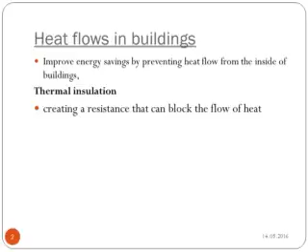Let's first define the purpose of thermal insulation and why we need it for new constructions and retrofitting. The purpose of thermal insulation in buildings is to maintain a comfortable and hygienic indoor climate at low ambient temperatures. A minimal amount of thermal insulation is required to protect the construction elements against thermal impact and moisture-related damage.

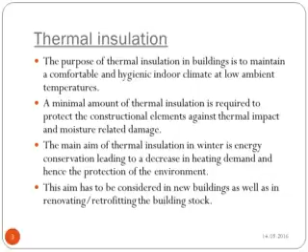The main aim of thermal insulation in winter is energy conservation, leading to a decrease in heating demand and hence the protection of the environment. This aim has to be considered in new buildings as well as in renovating and retrofitting the building stock.

And then we ask why thermal insulation is important for civil engineers and the public. Half of the energy we use to heat or cool our homes can simply leak out without insulation. Insulation helps to save money on energy bills, reduce energy use and lower greenhouse gas emissions, reduce reliance on heating and cooling systems, and finally, improve comfort.

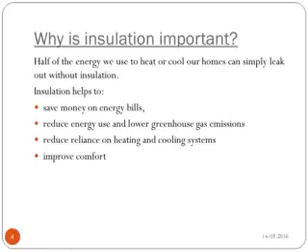Let's try to recall from the previous courses the terminology about heat transfer from materials. Thermal conductivity is a property of a material and is defined as the amount of heat energy transferred per unit thickness for a given temperature difference, expressed in watts per meter Kelvin. The lower this value, the more energy efficient is the material.

However, the thermal conductivity of a material is affected by density, moisture, and temperature of the material. When the material is moisture saturated, the thermal conductivity is increased.

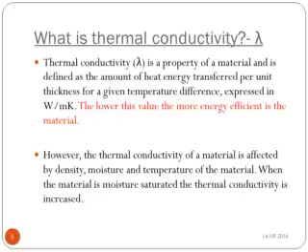The ability of a building material to conduct heat is quantified on the basis of its specific thermal conductivity value, that is, lambda. For insulation materials, coefficient lambda of less than 0.1 watt per meter Kelvin is preferable.

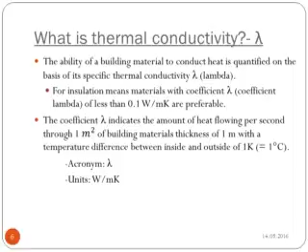The coefficient lambda indicates the amount of heat flowing per second through 1 meter square of a building material's thickness of 1 meter with a temperature difference between inside and outside of 1 Kelvin. Once again, the acronym is lambda, and the unit is watt per meter Kelvin. The lower the coefficient lambda, the better is the insulating material.

As long as we understand the meaning of lambda, now it is easier to learn about the U values. If you did not catch the definition of lambda from the previous slides, please watch carefully again while taking notes. Okay, now let's define the U value.

U value is the measure of the rate of heat loss through a material for 1 degree difference in temperature at either side of the material. As it can be understood from the definitions, thermal conductivity is a typical material property, while the U value can be calculated for structural members having different widths and/or for composite structural members made of different materials.

The calculation of U values can be rather complex. The U value indicates the flow of heat transferred from the inside out through an area of 1 square meter and a temperature difference of 1 Kelvin. Once again, the acronym is U and the unit is watt per square meter Kelvin.

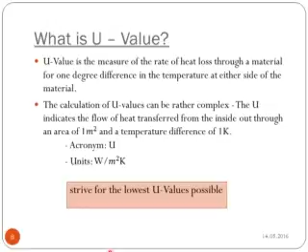That's a necessity for proper heat insulation: it is to strive for the lowest U value as possible. The lower the U value of an element in the structure, the less is its heat loss.

This table represents the typical U values for some selected thermal insulation materials. Have a look at cavity wall insulation materials. For cavity wall insulation, the U value of 0.30 can be achieved by either 100 mm thickness of expanded polystyrene

or 35 mm thickness of polyurethane foam board. As you see, different thickness values are needed to achieve the same heat transfer capacity for materials having different lambda values. Please check the U values of these materials carefully in this slide.

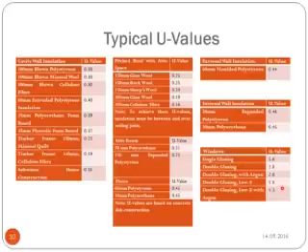Another important point to mention here is the high heat flow capacity of windows. You can see that the U value for single glazing is 5.6 watt per square meter Kelvin, while this value may be reduced up to 4 times by double glazing energy-saving argon types.

Let's define the thermal resistance or R value for structural members. Within the building, there is a transmission of heat from the environment, heated indoor air, to the cold outside, for example, through the walls outside or through the roof.

Insulation's ability to resist heat flow, preventing heat from leaking in or out, is described as R value. Insulation products with the same R value will provide the same level of insulation if installed correctly. The level of insulation needed will depend on the type of building and the climate zone.

Thermal resistance is equal to 1 over U value, which is the thickness of the element divided by its thermal conductivity value. The thermal resistance has a unit of meter square Kelvin per watt, the thickness of the element is measured in meters, and thermal conductivity is watt per meter Kelvin.

This formula is valid for single structural members. For multiple layer calculations, we will discuss in another lesson.

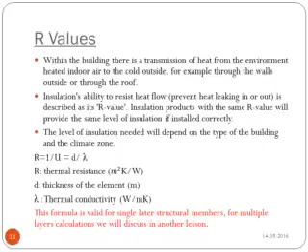Now it's a question of when to insulate buildings. The best time to install insulation is when you are building or renovating. Insulation should be combined with good design, including passive heating and cooling, so it can do its job properly, keeping you comfortable all year round.

Many specifications have minimum energy efficiency standards for new residential buildings and building extensions. Insulating your new home is one way to meet these minimum requirements.

Retrofitting insulation is also possible. If you are going to insulate your home at a later stage, the effectiveness and cost will depend on how easy it is to install. For example, it may be more difficult to install insulation in less accessible areas, such as existing walls.

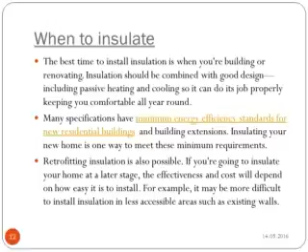Now let's talk about, one by one, some typical insulation materials and their important characteristics. How to choose the best material for insulation depends on knowledge about the types of materials, the intended use, the type of construction, and of course economic considerations.

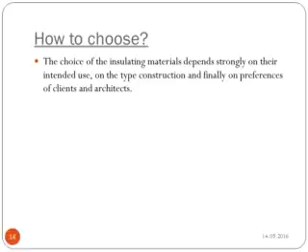Expanded perlite is used as a light granular insulation to fill cavities, such as insulation between rafters or insulation of ceilings, granular insulation under the concrete floor, and granular insulation of floors like filling of padding between the wood. Expanded perlite can also be used for the production of thermal insulation mortars and plasters.

Its lambda value is between 0.04 to 0.06. The material is open to diffusion. It does not rot, and it has good resistance to pests and chemicals. It can regulate humidity. Certain attributes of perlite have good acoustic properties, making it a good material for sound insulation. Expanded perlite is not

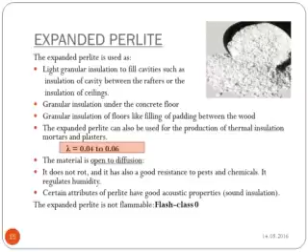flammable. The fields of application are the restoration of damp walls due to condensation; calcium silicate boards are applied mainly in facades subject to protection.

Calcium silicate is very open to diffusion. The high porosity leads to a large capacity of water storage and capillary transport. Active regulation of air and moisture is possible. It is resistant to rot. Panels made of calcium silicate are not combustible. When applied within the building, make sure that calcium silicate boards are surface treated and protected.

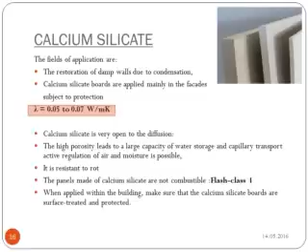Rock wool: insulating materials based on mineral fibers are proposed for all fields of application, except for walls in contact with the earth and for insulating roof parts which are damp. Its lambda value is between 0.035 to 0.04 watts per meter Kelvin.

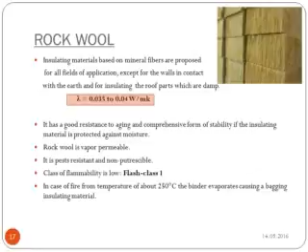It has good resistance to aging and comprehensive form stability if the insulating material is protected against moisture. Rock wool is vapor permeable. It is pest resistant and non-putrescible. Class of flammability is low. In case of fire, from a temperature of about 250 centigrade degrees, the binder evaporates, causing a sagging insulating material.

Basaltic rock wool: thermal insulation of pipes, equipment, tanks, boilers, furnaces, fireplaces, and components of gas turbines are possible with basaltic rock wool. It also has a specific use in soundproofing industry. Its lambda value is between 0.038 to 0.055 watts per meter Kelvin.

Class of flammability is low. The fibers of basaltic rock without a binder are combustible.

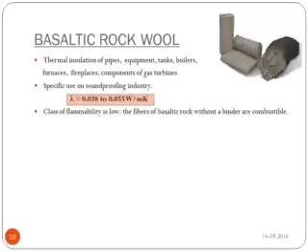Cellular glass is particularly suitable for insulation of outside walls in contact with the ground, under the foundation, on terraces, or on flat roofs, and in general in all parts of the building susceptible to moisture. It's also suitable for internal insulation.

Its lambda value is between 0.04 to 0.05 watts per meter Kelvin. It does not absorb any moisture. It's resistant to frost and weather conditions, and its compressive strength is high. The panels are relatively light and non-flammable, non-putrescible, and resistant to organic solvents and acids.

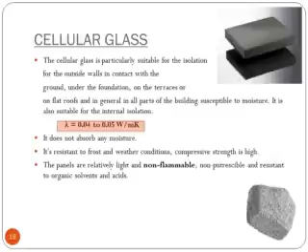Wood fiber panels are supplied in thicknesses from 10 to 100 mm for internal or external use. It's open to diffusion and its installation is quite fast. Insulation panels for insulation above or between the rafters of the roof, wall posts and wooden beam ceilings and walls, for suspended facades and partition walls.

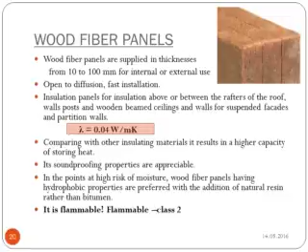Comparing with other insulation materials, it results in a higher capacity of storing heat. Its soundproofing properties are appreciable. In points at high risk of moisture, wood fiber panels having hydrophobic properties are preferred with the addition of natural resin rather than bitumen. It's flammable. Cork is obtained from the bark of the cork oak.

Today, the insulating panels are made of cork only in pure expanded version, that is, without addition of other substances. The cork bark is minced, and the granules are then baked in special tanks with high vapor water pressure and temperature of about 370 centigrade degrees.

Cork insulation panels are also suitable for soundproofing or for stamping noise. It has a high storage capacity of heat. Under the influence of moisture, it loses its insulating effect. It has a good shape stability and a good permanent elasticity.

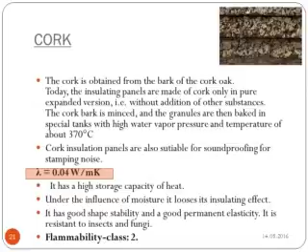Hemp. Suitable virtually for all common applications. Insulation panels are for the facade. Insulation panels and mats for thermal insulation in walls, pillars, ceilings with wooden beams, roofs and suspended ventilated facades. Infill material for filling cavities like hemp ropes for joints of windows and doors.

Soundproofing panels under the floor covering. Bulk fragments of hemp as insulation fill for the padding. Its lambda value is 0.04, and hemp fiber absorbs moisture up to one-third of its net weight and dries with no leakage. It also has a high capacity of storing heat compared to other insulating materials made of mineral fibers, like glass wool, resistant against rot, vermin, rodents, and mold.

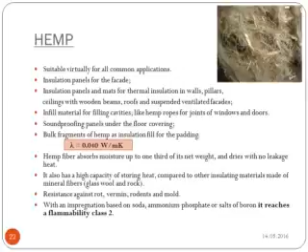With an impregnation based on soda, ammonium phosphate, or salts of boron, it reaches a certain flammability class. Polyurethane PUR insulating panels are used in construction mainly for continuous insulation above the rafters bearing and insulation of boilers and pipes. It has an excellent thermal insulation property with lambda value of 0.03.

The polyurethane foam, which has tight gas diffusion, has lambda coefficient of 0.025. It's covered on both sides with an aluminum film thickness of 0.05 mm or a non-woven mineral. It's available in different flammability classes. In case of fire, formation of toxic gases such as isocyanates, prussic acids, and other phosphorus compounds.

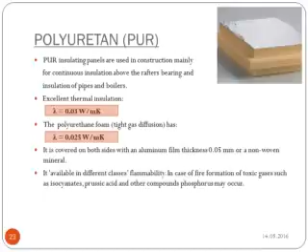Expanded polystyrene, EPS, is used for insulation panels for facades as coating, insulation panels for the insulation of basement and external insulation of foundations, soundproofing on the floor covering, and it's preferred as panels for roof insulation. If using interlocking panels in non-ventilated roof, it is important to ensure an effective vapor barrier to the panels.

It can be used in reverse structure roof insulation through hydrophobic panels. Its lambda value is between 0.035 to 0.04. EPS is resistant to rotting. The service life of the panels should be more than 30 years in accordance with actual standards. Its flammability class is 1, so in case of fire there is a strong formation of dense smoke.

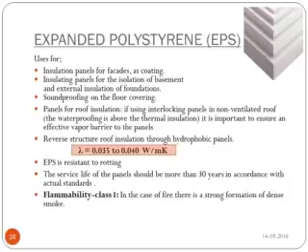Extruded polystyrene, XPS, is used for applications in wet ambient conditions. It's used for roof insulation, panels, green roofs with terraces and floors. It's also used for panels for the outer insulation against the ground. The extruded polystyrene panels in this application are glued to outer vertical waterproofing.

To protect them and to facilitate the discharge of water on the outside, a drain membrane can be applied. Its lambda value is between 0.035 to 0.04. The absorption of water is extremely small because of the expanded closed cell structure and the expansion of the film on both sides of the panel. Its compressive strength is high and it has flammability class 1.

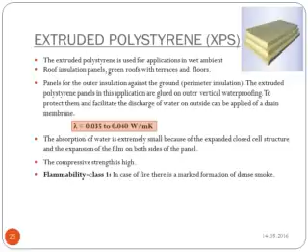In case of fire, there is a marked formation of dense smoke. Vacuum insulation panels are made of evacuated microporous silica coated with a film of metallized plastic that keeps the vacuum. It is used for insulation of the ceiling of the basement or under the floor. They can be installed in such a way that it's not to be damaged.

Its lambda value is 0.0042. A vacuum panel with a thickness of 2 cm produces the same action as an insulating polystyrene panel of 20 cm thick. The product should be processed with particular care to not destroy the protective film and to avoid breaching the vacuum.

Manufacturers provide a maximum thermal conductivity of 0.02 watts per meter Kelvin. They are produced in any size. The production of vacuum insulation panels allows dimensional tolerances of minimum 1 mm in order to avoid leaks in the joints.